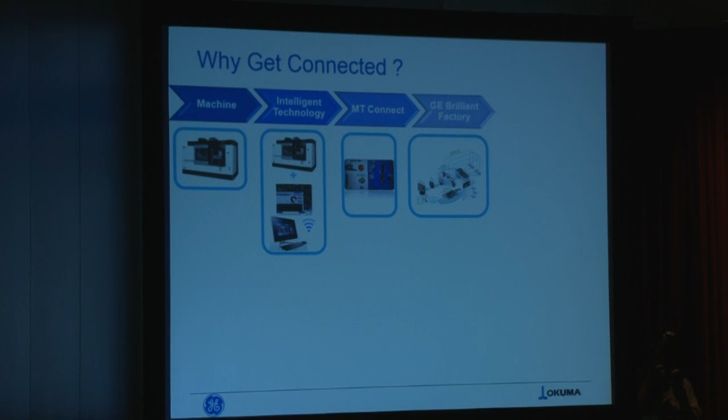Machine tools have evolved over the last decade from the electromechanical servo systems into these intelligent technologies where we're now embedding more and more sensors in the machines - accelerometers measuring vibration, thermal sensors, acoustic sensors - really for the machine control to improve operation of the machine, speeds and feeds, cutting conditions, offsets based on sensor feedback. As we move into the brave new world of IIoT, those sensors become a terrific source of raw data for big data analytics.

By connecting to a network and uploading that data, you can compare it with other data, not even from the machine - maybe part quality data from the CMM or operational data - and cluster analysis, anomalies, cross correlations of data can be discovered. That's IIoT and big data analytics, using data to make better decisions in manufacturing. So I mentioned, why get connected? 2 compelling statistics.

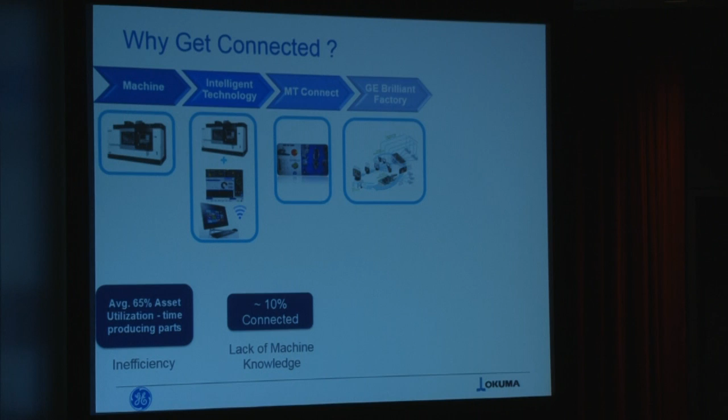Average spindle utilization in the US is about 65%. That means, by definition of average, half are below that. And when you consider that, and the other statistic being only about 10% of the machine tools in the US are connected, it makes you wonder how do you know where your spindle utilization is. I don't see a lot of the old industrial engineers with a stopwatch and clipboard anymore. Getting connected is really easy. So we have an opportunity here.

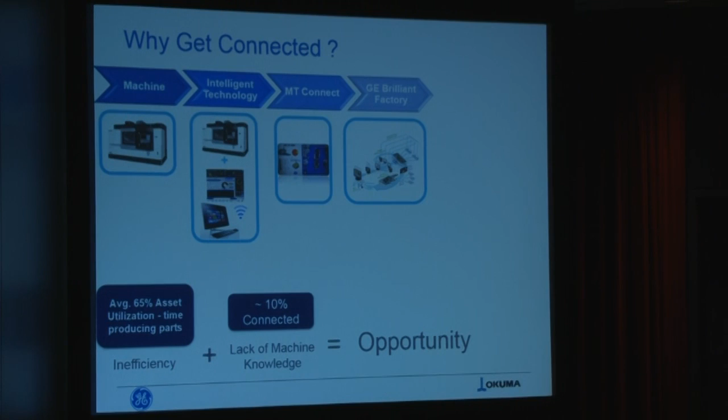Stop for a second, forget you're here, go back home in your mind. The last computer you bought, your home PC, you bought it maybe at Best Buy or Walmart or online. You got your computer, plugged in the power cable. What's the very next thing you did? You plugged it into the internet or connected to your Wi-Fi. You know the value's there. It's easy to do, and connecting your machine tool is just as easy.

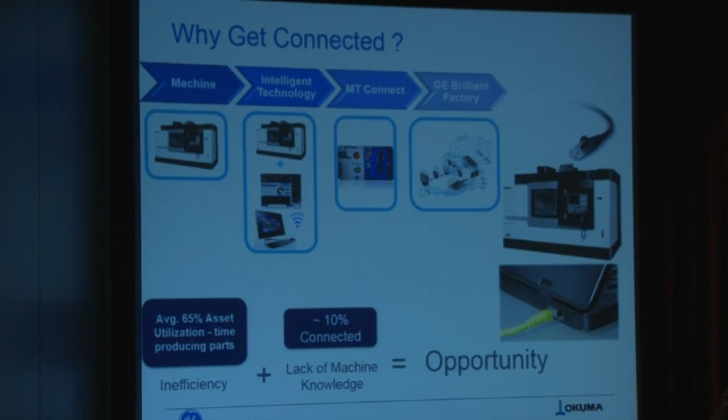Many of you may know Okuma Control, it's PC-based open architecture, has been for 10 years. By PC-based, I mean it's literally an Intel i7 dual-core processor running Windows, identical to the laptop we're running this presentation on. So if you can connect your PC, you can connect your machine tool. It's got the same Windows network control panel, the same network center, same little icon down on the system tray. So if you can connect easily, knowing that, looking back at the 65%

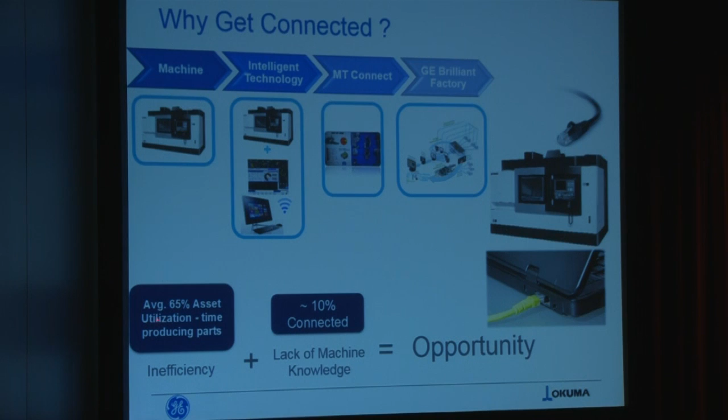spindle utilization. If you can connect easy, a simple red, yellow, green machine status - machine stopped, machine's idle, or machine's running. Simple red, yellow, green could get you approaching 5 hours, 5.2 hours in an 8-hour shift. Simple red, yellow, green will get you approaching 7 hours pretty quick. So if you can connect it easy, and you could get some simple red, yellow, green, why wouldn't you do that? And we'll get back to that in a second.

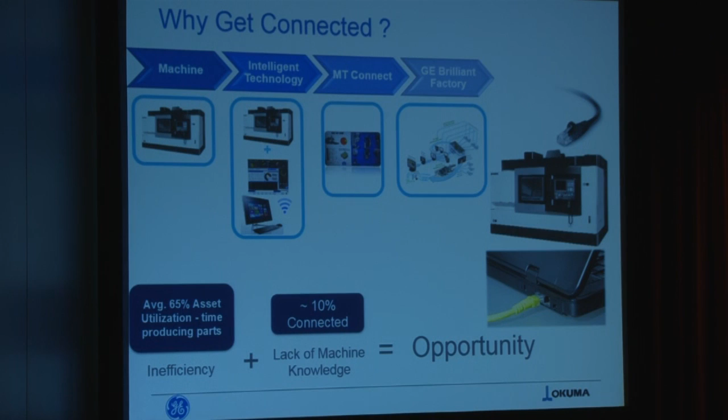You'd have, say, your production schedule, maybe a countdown timer of how many more jobs he has to build in this current batch. And oh, by the way, you could tell them this is the next part you're making, and you're going to need this work holding and this tooling and this NC program. Help them with the setup. That's the big source of the yellow idle time - people are usually wondering what they're going to make next, and they don't have the right stuff to do the changeover.

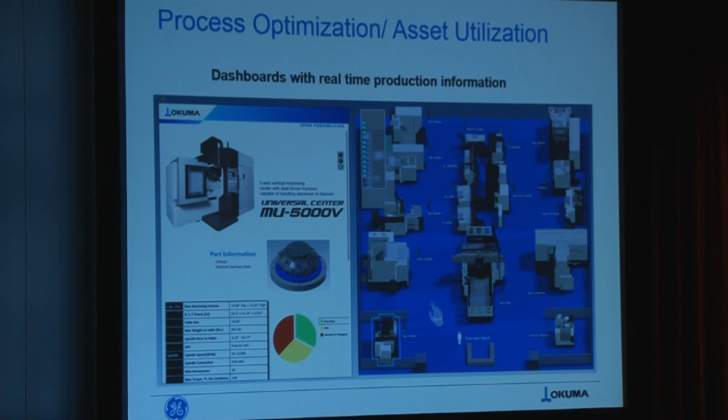So it's very simple, feel free to go down and touch it. That's what this little hand here is for. True story - we have this in our lobby at our headquarters down in Charlotte, and it sat there and looked real good. A lot of people would look at it but really wouldn't mess with it. So we put a big physical sign on top that said 'Touch me.' And it worked pretty well, but our receptionist really wasn't fond of the sign. She liked the touch board, but wasn't too fond of the sign, so we put this little hand here. Point is, go touch it.

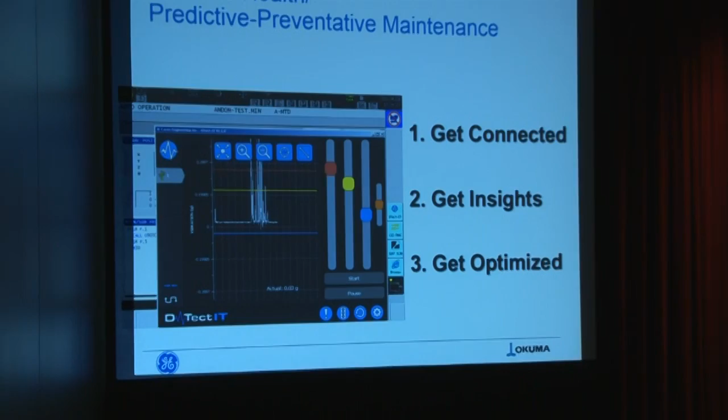All the value's there, and you'll see how easy it is to sweep through different pieces of information, all of which come from MT Connect just by connecting your machines. So it's red, yellow, green, very simple asset utilization, and of course there's a lot more to IIoT than red, yellow, green. There's machine health, predictive preventative maintenance, energy management, consumable management, quality - it goes on and on. The point is, regardless of the category you put the IIoT improvement in, the steps are the same: get connected, get insights, get optimized.

This predictive maintenance, machine health, and the previous red, yellow, green process optimization are both simple examples that Andy is going to show you - real-world savings achieved in production today in both of those areas. We can't talk about all the areas of IIoT, that could be a conference all by itself. We just wanted to show some really simple, low-hanging fruit benefits of getting connected.

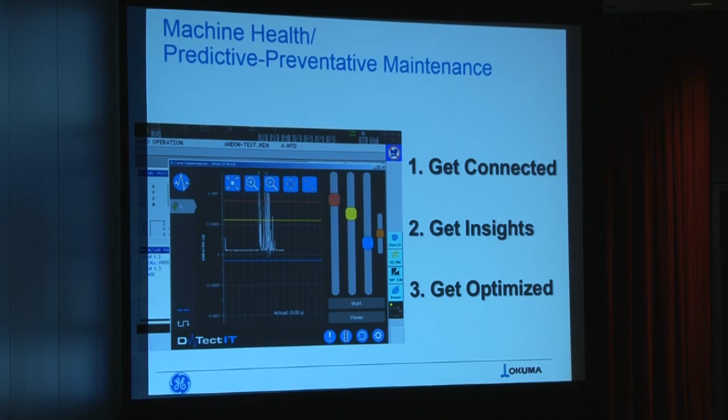So now I want to talk a little bit about how simple it can be to get connected. You saw earlier, physically it's as easy as connecting your PC at home. On the software side, this is the Okuma App Store.

myokuma.com. We've had this out for 2 years now. Most of the apps on the Okuma App Store are free. Like other app stores, Okuma wrote some of these apps, but more were written by others - customers, distributors, partners like Sandvik, which has apps up here. Renishaw has apps. You can see ABB, Delcam, Blum.

This app up here, MT Connect Agent Adapter, has been on the App Store for exactly 2 years. IMTS 2014, we put that up there.

And it is the second most downloaded app on the App Store. Well, some of the people that download it would download it and run it, and then they'd say, "What is it doing?" You know, streaming MT Connect, it's XML data, it's invisible.

They couldn't see it. So we put these two apps up there, MT Connect Display and MT Connect Display Mobile. They are both free, open source apps. We didn't write them - you can get the source code, same place we did. They are agnostic - they'll display any machine tool, MT Connect, from any other brand of machine, from any device at all - robots, CMM, gauge, anything. They're actually a terrific little MT Connect commercial.

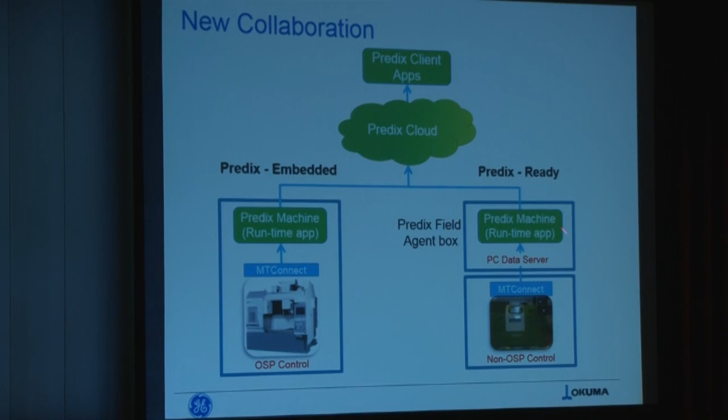Okay, so what's new with GE and Okuma? What are they collaborating on? You start off here on the right side looking at Predix Ready. You Google Predix Ready, you'll get a page full of hits. This has been around for a while - this is the way everyone would connect to Predix today. The key here is this Predix Field Agent box.

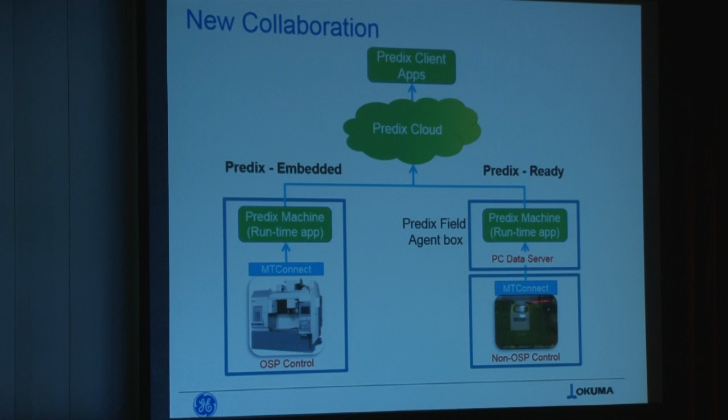You'd have multiple machines daisy-chained down here. They'd be feeding your Predix Field Agent with MT Connect or OPC UA, like with Industry 4.0. Either one, they'd all be sending data to this Predix machine field agent, and that field agent would be sending your encrypted data up to the Predix cloud.

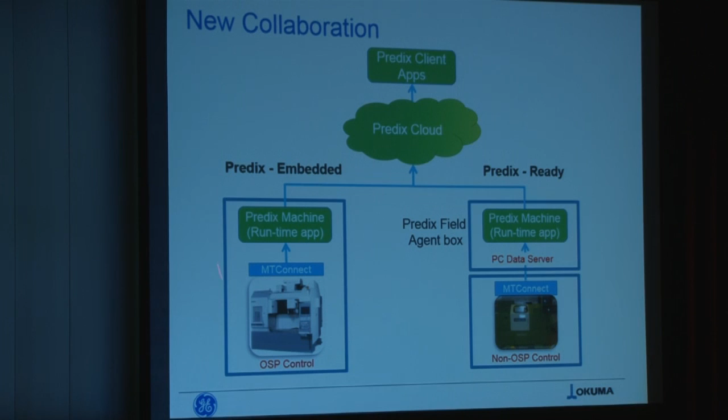As I mentioned earlier, Okuma's control is a PC. This field agent box is a PC. All we did was take this Predix machine runtime app and run it directly native on the machine tool itself for Predix embedded. Seems simple. You think about it, the future - our children's children, all machines will run this way. They'll have data collection utilities native on the device itself, sending data to a cloud, wirelessly. That's a clear step.

The field agent box isn't going away anytime soon. Number one, not everyone can run the Predix machine app directly on their machine yet. And for older machines - Okuma's got a lot of machines older than 12 years old - they'll connect through a field agent box as well. So while that's not going away anytime soon, the partnership of running native direct on the machine has some key advantages. Number one, network traffic goes way down.

Over here, you've got MT Connect polling at some interval, and you've got mega data from all your machines coming up to this - a lot of network traffic. Over here, this MT Connect really isn't going external to the thing, it's just using it. We use parts of MT Connect to access Okuma's API layer to get machine data and feed it right to this Predix machine app running right on the control. So it's really not going anywhere in the network, and you're just sending event-based changes to the Predix cloud.

So reduced network traffic. Number two, obviously, there's no box. That can be big - less hardware, less cost, less wiring, less confusion. People want to pull in IT people when they start looking at this, and this is incredibly easy. It's running right now today down in the Okuma booth - you can see the Predix machine running. They're pretty excited about how quickly they could implement it because there's no IT infrastructure involved.

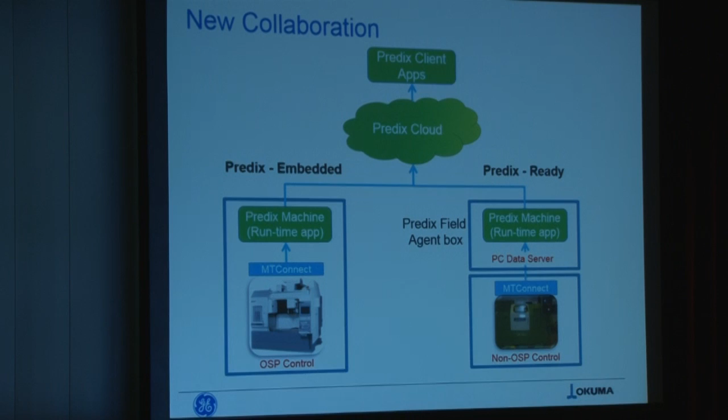A good analogy a friend once shared with me: back on your home PC, you plug your power cable in, you plug it into the internet. What's the next thing you do? You click Internet Explorer because it's right there on your machine. You know it, you trust it, obviously it's worked out, the builder put it on there.

People that want to get started with IIoT, collection of data - it comes on the device, all they do is connect it, and they hit this button and they're sending data to a Predix cloud. That's an important step in the evolution of a technology, progress. People need, we need to make it simple - our children expect it that way, very simple and intuitive. And it comes loaded, already tested, already works together. So it's a seamless solution.

So in closing, that's really our whole pitch - get connected. Make it very simple, very intuitive, progress the technology, and get everyone online. Get connected to improve your asset utilization and productivity.

Sorry. I don't know if that's as loud as it is for everyone else.

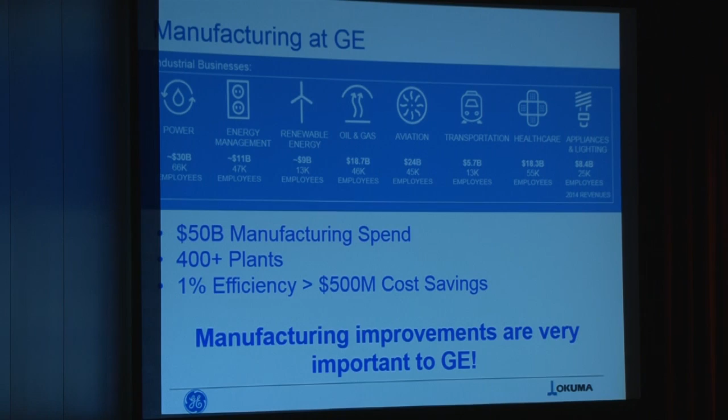So how do we wrap our heads around industrial Internet of Things? GE makes wind turbines, so we tend to think the world revolves around a wind turbine or a gas turbine or an aircraft engine or whatever other things GE makes - keyword being things, these are the things. Me, I'm a manufacturing guy, so I tend to look at it and say, well, I have a thing inside my factory, a machine tool, possibly, likely an Okuma machine tool.

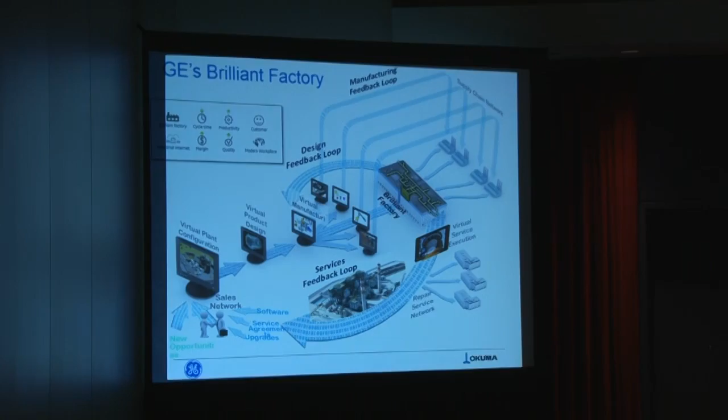So internally we talk a lot about a brilliant factory, and what this picture is showing is where that brilliant factory sits in this digital landscape. GE has been going through a digital transformation, and one area that could start is inside of your manufacturing operations. And so we started thinking about our manufacturing operations and started thinking about this brilliant factory concept.

So what you see here is a whole lot of other stuff around it, and this represents what we call the digital thread. Data might come in from your sales team, your marketing team about customer requirements. Then you start putting those requirements into design. From design, the models get handed off to manufacturing. Manufacturing takes those models and starts coming up with cutting tool paths, other production information, and some of that gets fed into your factory, some of it goes into your supply chain. There's all sorts of feedback loops from the factory back to, say, the virtual side of manufacturing, back around through your customers and your repair centers, back into your sales and marketing groups again to drive further requirements.

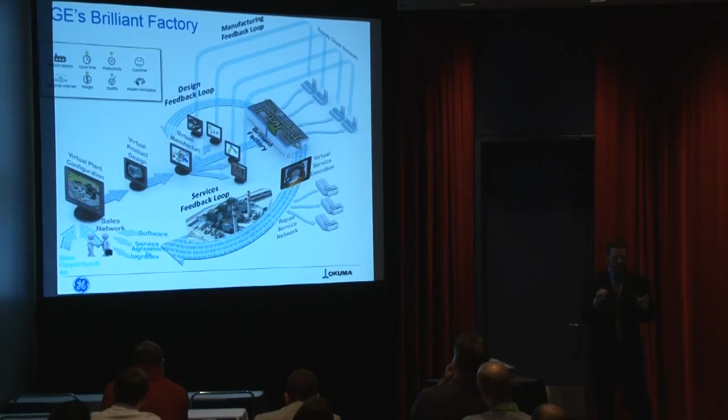So there's this loop that the thread runs through, and there's all these different segments that the thread touches. All of this, what GE sees, is for the purpose of decreasing cycle time, increasing productivity, increasing margins, increasing quality, and in the end, happier customers. Going back to my first slide, we're doing this at a fairly large scale across our own enterprise, and we think that we're doing things important enough that we should share with others out in manufacturing, or in all industries and manufacturing specifically.

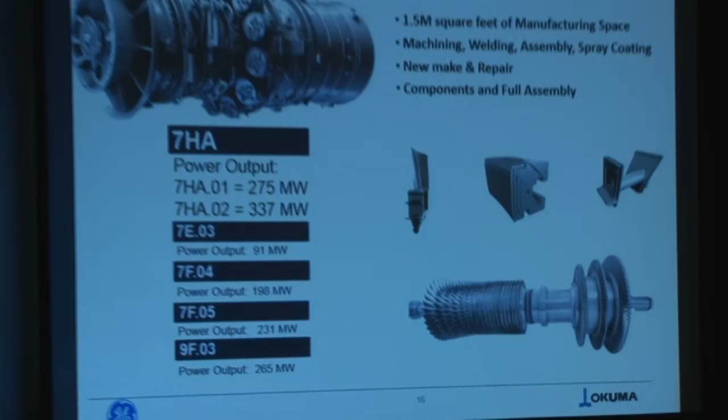So as Jim mentioned, I come out of Greenville. I still sit in Greenville, even though I've changed positions. My first 5 years with GE, I was an advanced manufacturing engineer in the plant, in GE Power. A lot of that time was in the plant. But what is Greenville? Greenville makes gas turbines. It's a 1.5 million square foot manufacturing facility.

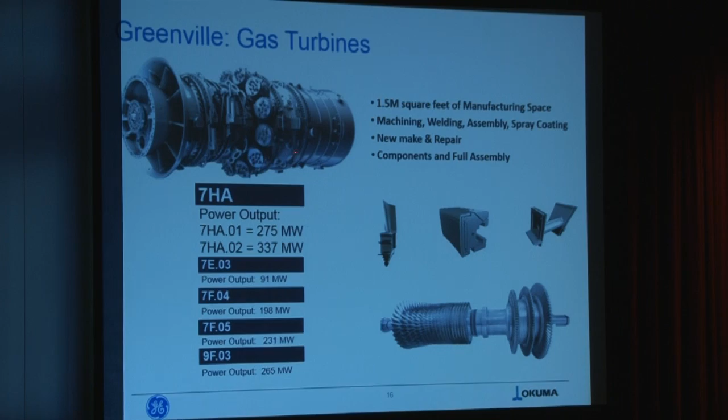Something on the order of 430 different devices that we want to connect and start gathering data from. 300 of those are CNC machining centers. In addition, we do welding, assembly, spray coating. There's new-make gas turbines as well as repair. And we also do a number of different components. This is just some information about our turbine products, and just for scale purposes, a person would stand about this tall next to this thing. It's humbling.

So as that internal team started thinking about Brilliant Factory and what it means to us internally, I think we're not unlike just about every other manufacturer, that we think about ourselves as a cost center. So we sat down and started thinking, well, where are our major costs inside of our plant? Energy management is a big cost, and we decided we needed to focus on energy management. Really, I think there's a lot of facilities management involved in this as well, because we're talking about electricity, but also process gases, building management, compressed air. Another key part of it was maintenance of all this equipment that exists inside that plant.

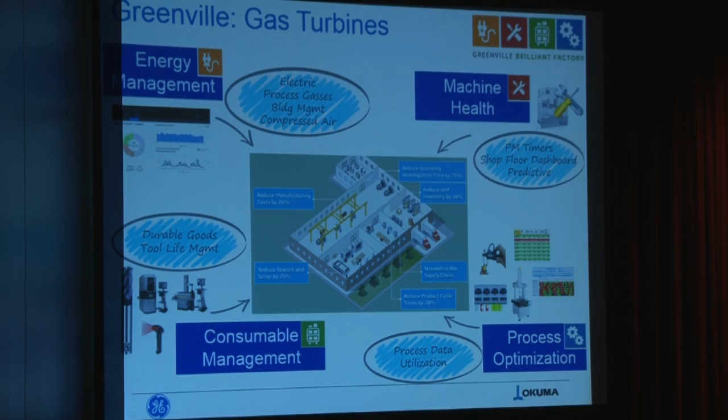So we focused on machine health, some things we're working on are like preventative maintenance timers, moving from calendar-based to actual hour-based maintenance schedules, and gathering that actual utilization, those actual hours from our machines on the floor. Then we have a number of different dashboards to help us manage work orders and our maintenance schedules. Then jumping to the other corner, consumable management, so things like cutting tools, even PPE is another great example of where we're finding savings in this corner.

The other one, the one I was mostly involved in, was process optimization. So when you look across all of these, what do you do to your process to make it run more efficiently, more productively?

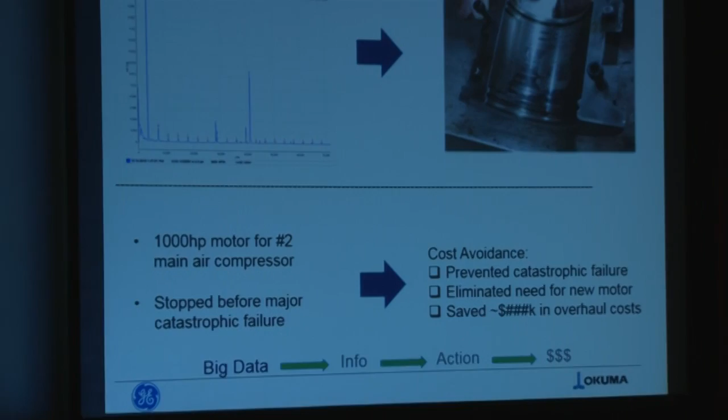That's how we in Greenville thought about this concept of the Brilliant Factory. What I'm going to do now is show 3 examples from energy management, machine health, and process optimization, and they're really in that get connected phase and get insights phase. We're still proving out different use cases for get optimized.

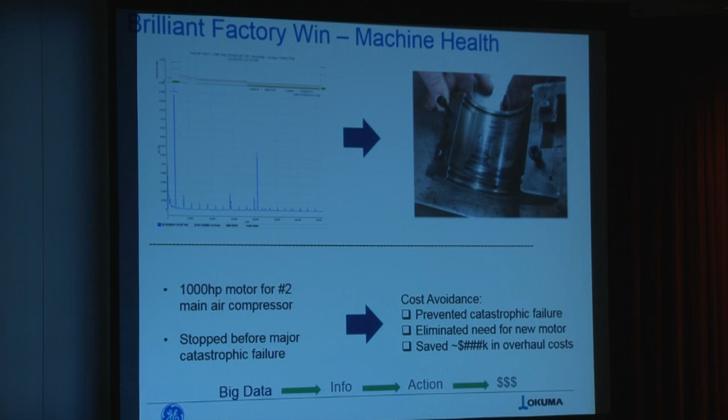What we see here is we have a 1,000 horsepower motor connected to one of our main air compressors. This supports a large part of our plant, so if this goes down, then a large number of our processes stop running.

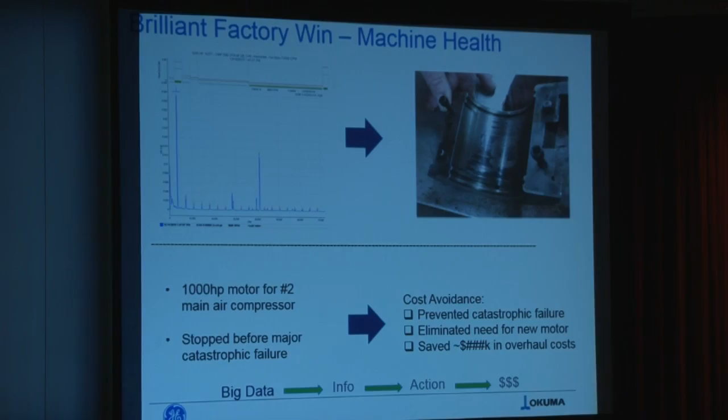Utilizing sensors and some software from one of our businesses, we put an accelerometer at that motor for this main air compressor. Based on knowledge about rotating components from our external businesses, we knew what frequencies we should expect the accelerometer to pick up when connected to this motor. When we started to see a frequency outside of the normal pop up on this graph, we knew there was something not right about this particular asset.

What it led us to do was go do some investigation, and what we found was that one of the oil rings on a bearing wasn't working properly, so this bearing wasn't getting oil, and what you see is the wear that has occurred there.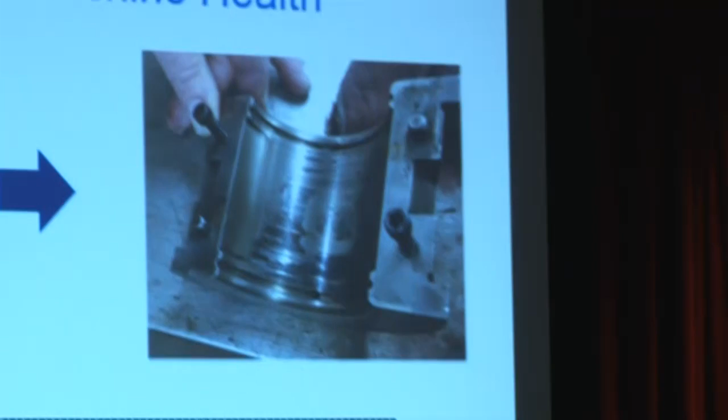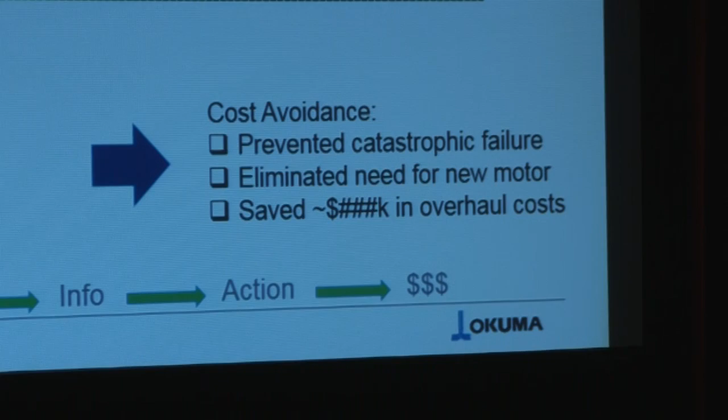But the point is, we used the data, saw that something wasn't right, and scheduled downtime before anything catastrophic happened, before the processes stopped. This ultimately eliminated the need for expensive new components, but it also prevented excessive downtime in our production. We saved on the order of a few hundred thousand dollars in overhaul costs, but that's not even including the cost that was avoided because something catastrophic didn't happen.

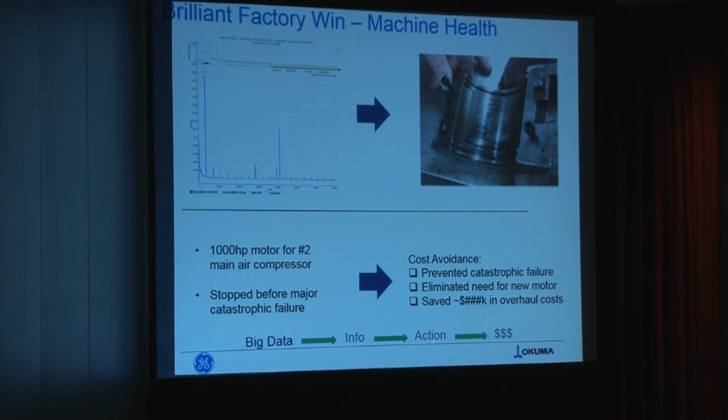This down at the bottom was kind of our mantra: we were going to take data, turn it into information, translate that into action, and we were going to save money in the end.

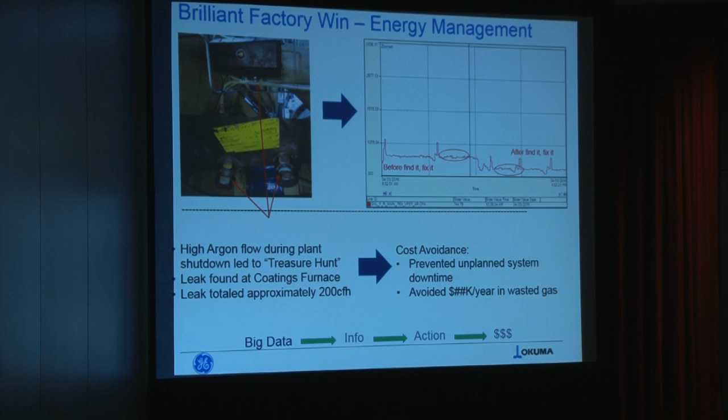From an energy management standpoint, again, there's a lot of facets to energy management. One of those is we put flow meters on a number of our different gases inside of our plant, in strategic locations in the piping.

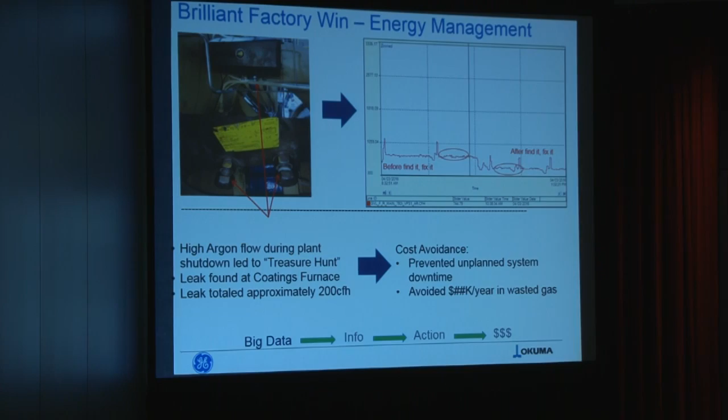There was a New York Times article recently that you may have read, where the plant manager in Greenville was quoted talking about a snowstorm event when the plant shut down. There was nothing happening in Greenville because we're in the South. Nothing was happening, and what we saw was that we still had a high load, a high volume of gases flowing through our pipes. We said, wait a minute, nothing was happening, why do we still have those gases flowing through the pipes?

Well, it was due to leaks. Because we know where those sensors are located in our network of piping, we can say this section of our plant is where those leaks were occurring, and we can do what we call a treasure hunt, walking around and listening to try to find those leaks.

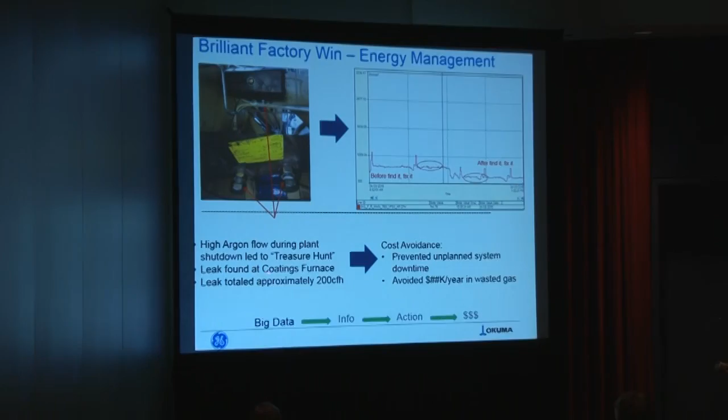This is an example of one of those, just like our plant manager was quoted talking about, but this was on our argon system. What you see is what the load was on the system before the leak was found, and then what the load dropped to after the leak was found.

In this particular example, just this one example, we've avoided tens of thousands of dollars per year in cost of that gas. When you start to have multiples of these like we have, then that savings really adds up across your entire plant.

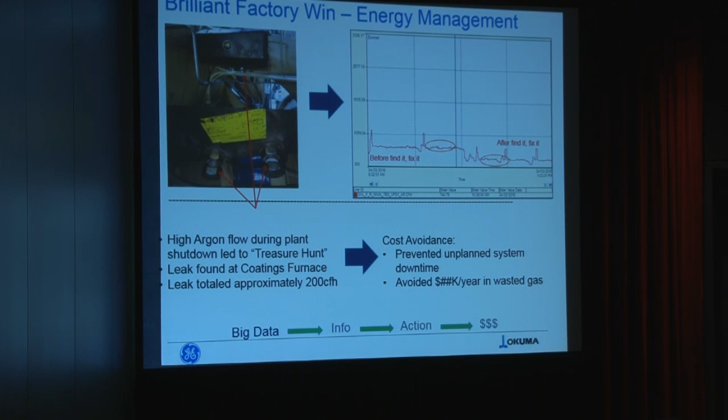The other one is process optimization. As Jim was talking about, some simple red-green information about whether the machine is running or not running. But the key part is we had historical data - that's key, that we could go back and look at long-term trends. There was a particular machine that was not producing up to the standard that another machine, just like it, producing the same parts, was achieving.

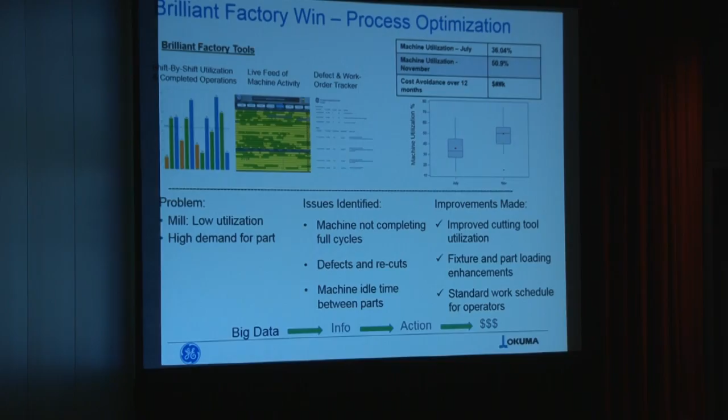And the data showed that there was excessive variability. So what do I mean by that? In your process, you expect it to run for some amount of time, then not run for some amount of time. Maybe it runs for 2 hours, maybe it doesn't run for 15 minutes while they're doing changeover. What they were seeing was that this particular machine would run for less than 2 hours, then be down for 15, 20, maybe 30 minutes, then run for some other amount of time, not 2 hours. That data highlighted that this machine didn't have a stable process. It wasn't running the way they expected it to.

That in itself didn't solve the problem, but what it did was give the manufacturing engineer an indication of where to go look. He was able to go out with the data and say, I noticed that at 7:15 this morning your machine stopped for 15 minutes, can you help me understand why? That drives a much better conversation between him and the operator, because the other scenario is he just walks around and asks how things are going, and the event could have gone by with the operator saying things are okay now. But now the manufacturing engineer can use that data to drive that conversation.

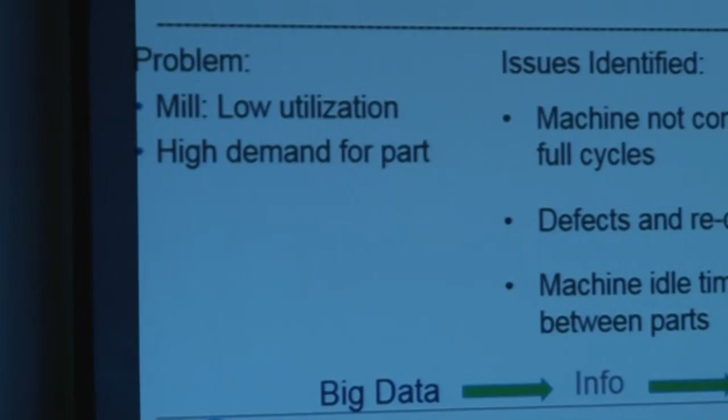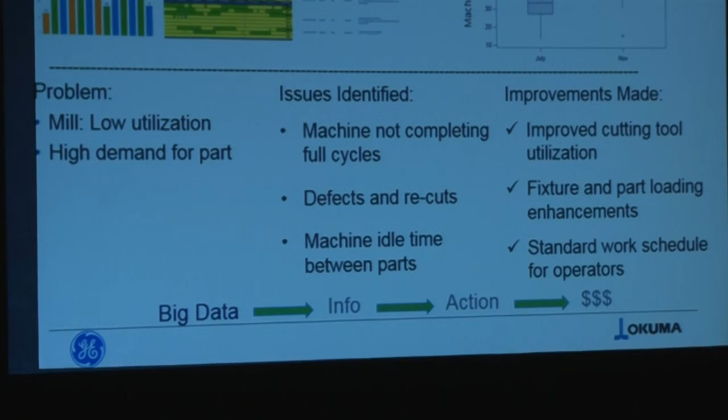What they ended up finding was that the machine wasn't completing full cycles. There were defects and recuts, and excessive idle time between the parts. This led to improving cutting tool utilization, because we found that some of the cutting tools were chipping and not making it through the full life, and there were some parameter issues that were corrected.

The defects and recuts were attributed to the fixture itself and part loading, so that was analyzed and addressed. We also found that some operators weren't following the standard work schedule, so there was training between operations leadership and the operator to clarify expectations. All of that led to about a 15% increase in utilization for this particular machine, and again, tens of thousands of dollars in cost savings.

This is one machine, and as I mentioned a moment ago, we have 300 CNCs, and over 400 devices that we're connecting, so this can really add up across that population as well.

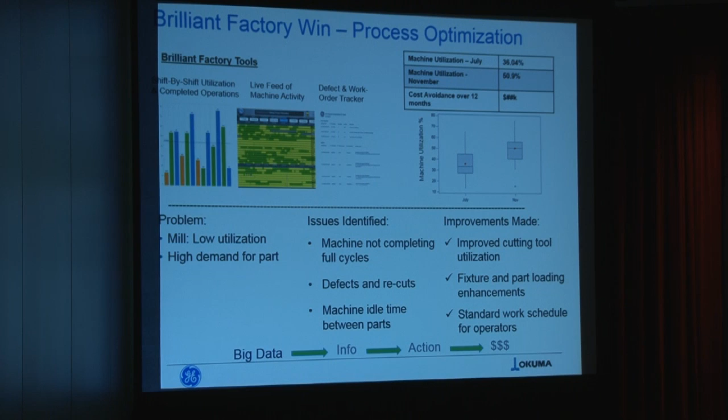So what are we thinking about as we talked about get connected, get insights, get optimized? What are we thinking about with get optimized? Well, what if that machine is putting out a lot of data? Okuma's great, they provide us with tons of data. How do we use that to be smarter about our process?

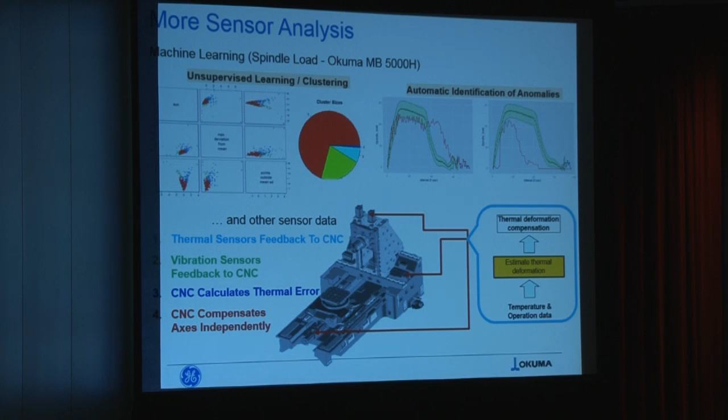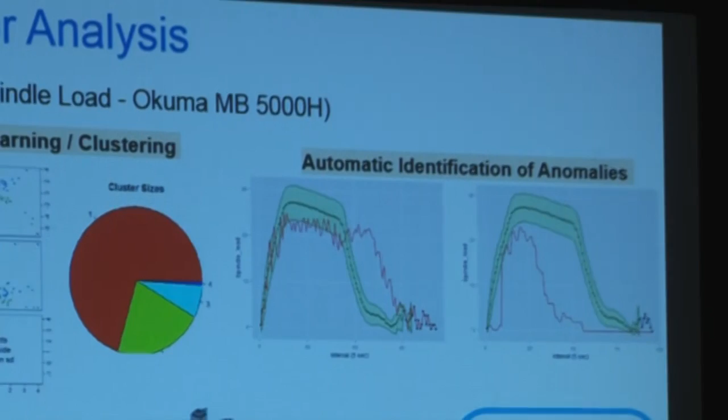It's not always possible to have somebody just monitoring that data, looking for things that point them towards something they need to address. What if you could apply machine learning techniques from what companies like Google and others are doing? You can start to look at spindle load and do some clustering to say, what's normal? Green might be normal, and anytime the curve falls outside of normal, then maybe you send an alert to somebody saying, hey, something's different.

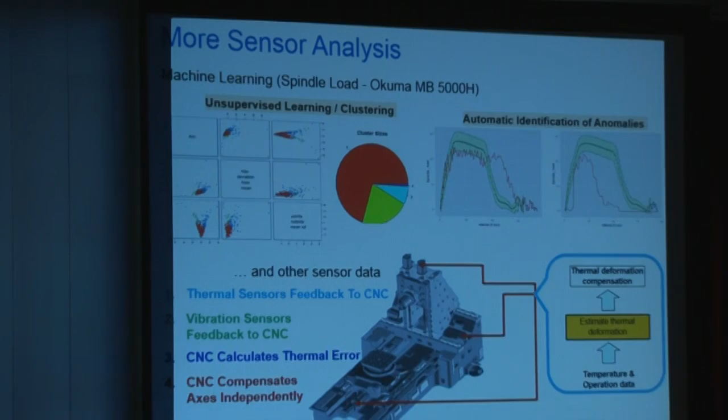Then what do you do if something's different? You might start looking at your quality data to see if that actually turned into an issue, and where that issue was. Can I drive it back to a specific part of my process? And can I address the cutting tools, the fixture, or anything about the process for that particular area?

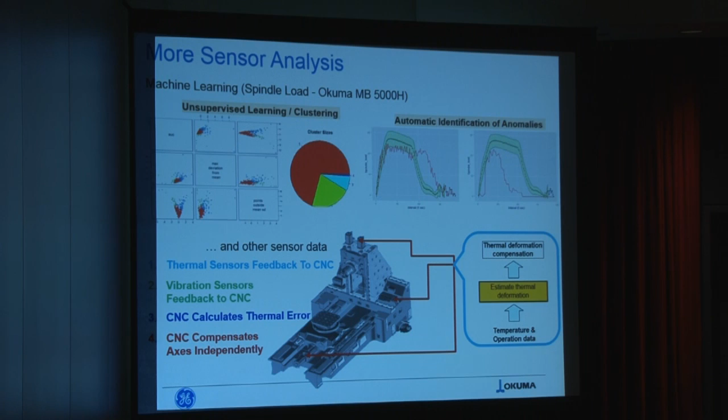Moving beyond just spindle load, the Okuma machines also come with a number of different sensors, thermal sensors, vibration sensors, that they're using for their own purposes. We could go put those on ourselves, but why not just ask Okuma for it. So that's what we've been in discussions about recently, whether we can get that data so we can start to do similar analysis and get even smarter about how our process is running.

So with that, I thank you all. I started out with why GE cares, how we're wrapping our head around it, and then a few examples and thoughts about what we're thinking about. So with that, I want to turn it over and ask if you have any questions.

Yes. Could you please return to the last slide? Sure thing.

As you collect data over time, is there any thought to using that data to autonomously self-correct, or create alarming that says we've learned over history this die has to be changed when this happens, so it becomes autonomous in nature? So really IIoT. The answer is, we're thinking about it. Yes, that's a futuristic view that we share with everybody.